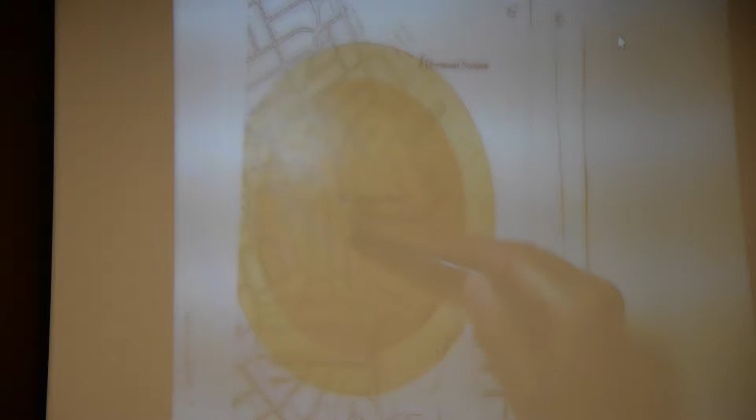So our project is a little bit fuzzy, but you can see it was on a high-profile road, and there were all these churches right across the street that were really remarkable, and then there was a historic building fabric around it. But it was a high-traffic corridor between these transit stops in Pittsburgh, and here's the downtown—this building was on a high-traffic corridor, so it had been lined with awful buildings like this one.

So the property values were up very high, and people weren't expecting that. It was zoned for that. It was hard to make a case for lower residential, but since it's a corridor, it made sense to have a higher density.

But, on the same token, right across the street was some of those beautiful churches in Pittsburgh like this. And some of the residential houses of that neighborhood were, and everybody knows Mount Lebanon for its wonderful English Romantic architecture. So the question was, how do you marry those styles?

So the invention that is going on here is kind of an example of what we did here. What we had to do was try to consider how you bring together styles and things that are not necessarily compatible, which was a challenge. So we learned our basic architectural techniques of base and top, and then we kind of evolved them. I'll talk about that in a minute.

We also tried to create local symmetries, and at the same time understanding how this has almost the evocative shape of a house, or single-family residential house, on top of a larger building. So it became a kind of flavor that goes together.

In the site plan, this is actually a gateway to Mount Lebanon. When you drive up the hill, you actually see this rising above you, and you can see the turrets of the church right across the street.

So the idea is how we took the strategies we learned, basic strategies, and then applied them in this particular context. We also have a second building down the way here. That will help roll into some of the discussions we can go through in our examples. Keep that going.

So what I'll do is we provided you with two pieces of trace paper, there's more if you need some. We're hoping that we're going to be drawing along some examples and ideas, and let you guys learn some of these techniques if they're interesting to you.

So the first thing in terms of composing a mixed-use building, or almost any house, what we've noticed is that oftentimes people have the wrong paper size. I've seen that a lot, and I've actually noticed it in my own work.

If you're looking at art, say here's a picture of a beautiful building, that kind of thing. If you're looking at the art, you want to be about the diagonal away from it. So that dimension of that building in the drawing is how far you want to be away from it. So when you think about that, it's exactly the same thing when you're working on a mixed-use building.

I've seen people laying out these buildings this large, and they're trying to compose something large, and you can't take it all in your own cone of vision. Michael Jordan had really good wide peripheral vision on the basketball court. I don't, so I have to keep it kind of here. So think about that — sometimes if you're struggling with the composition, maybe just change the scale of your drawing to something that's a little more comfortable.

The other thing is choosing the right scale for what you're doing. Don't try to solve details at a small level. Solve those at a detail that fits your paper size in front of you. If you keep that in mind, you'll always do really well.

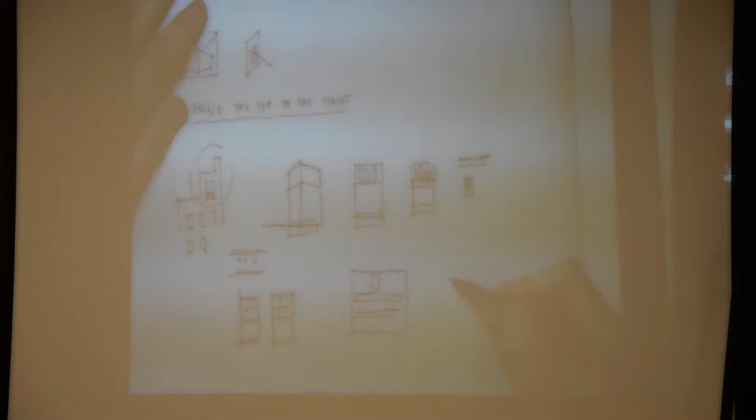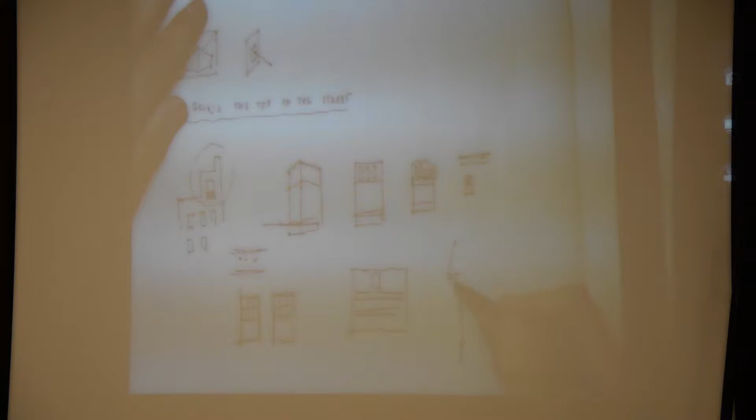So when you look at a building like, say Le Corbu, like Villa Garches, you have these crazy stripes, and then you have these kind of big openings in the strip, but you have this really enormous top to it. What that is, is he had been trained in the classical language, so he knew that if you have a top like this, here's your window - when you're standing on the ground looking at it like that, you can actually project that up, so you can actually read that up higher.

So basically that is the extension of the cornice. You want to think about things from the view from the ground. You can also see that for those skyscraper designers in here - I'll tell you a little bit about that. So, bringing the top to the street.

Let's see, if you were to look at, say, the Chrysler building - something like that - you look at it from a distance, and you can't really see the whole thing, but you can see that it has this huge proportion to it. The idea is that when you look at it from the street, you would be able to see the whole top when you're looking up at it. So this kind of becomes the right scale. When you look at a smaller building, it has the similar idea. So bringing the top to the street is something I wanted to mention.

The second thing I wanted to tell you about is upsize your windows - that's another really important trick. Oftentimes in modernism, the great gift of modernism to architecture was the interconnectedness of the interior and the exterior. So why should we not take that into our own inheritance? When you look at a building and try to put really small windows like that - particularly today, sometimes we're trying to do more livable interiors and get as tall ceilings as we can - if you do really small windows, the exterior tends to not look as strong.

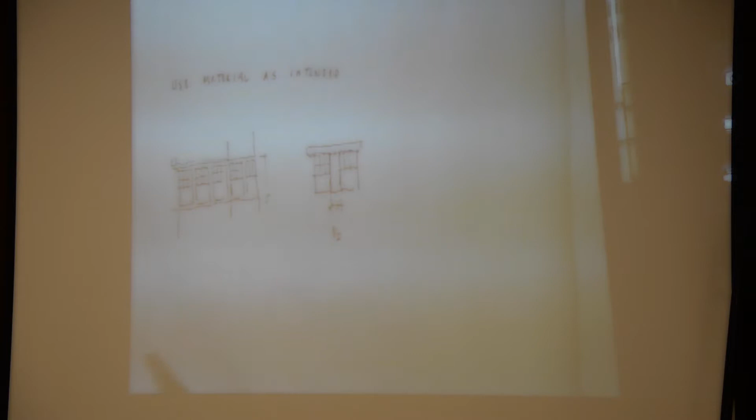And then the other thing is in stone, or masonry, generally when you get more than 3 windows wide in composing a facade, you really need to think about the fact that the expression of that lintel needs to be large enough to feel like it can go. Now, you may be saying, oh, Eric, when we've got a brick building, it's wood framing underneath and so forth. It's just a natural compositional technique that probably makes more sense.

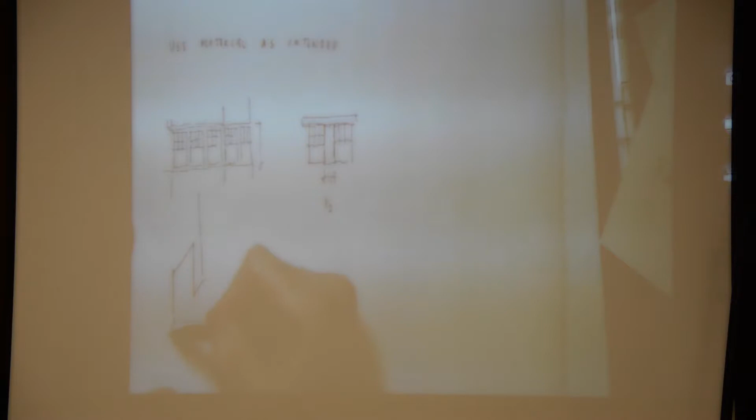The other thing is that when you're working in a material, for instance a stone facade, it's important to find the right time to switch over materials. So if you're thinking about a facade where, massing-wise, you want to bump out. So you have a room on the base of a building. Here's your building, and you're gonna pop something out like that. Think about making that in an alternative material to make it read like this is a masonry opening in the building. So here's the windows here.

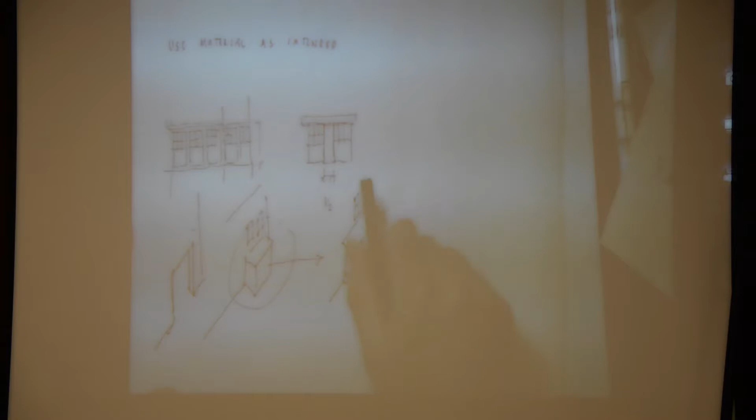So you may want this to read like maybe it's stone. Maybe it goes to steel, or wood. That way, the masonry building next to it reads stronger. Let me show you an example of that as well.

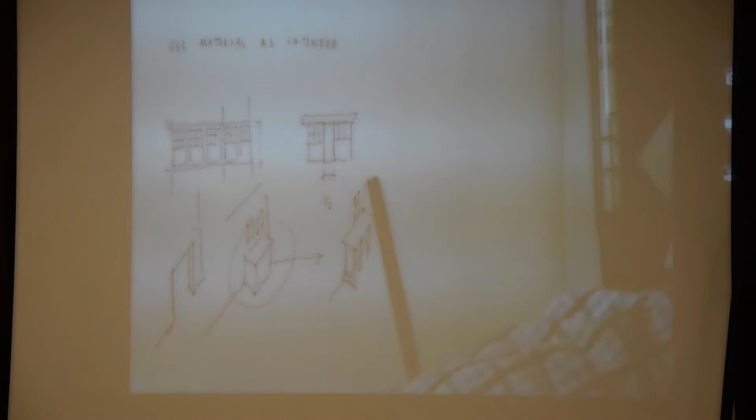Sorry, misplaced that one. But nevertheless, switching materials is a critical... understanding where to switch your materials. So for example, let's go back to this one for a second. If you were doing a brick building, and we're working on some buildings in Detroit like this, where we have, right here, a pair of double hung windows.

And then you go to 5 windows. This is changing over to, it's an industrial area, this is changing over to steel at this point. So we have steel panels. So if you have to group windows, consider changing your material and following that along. So that would be the next lesson.

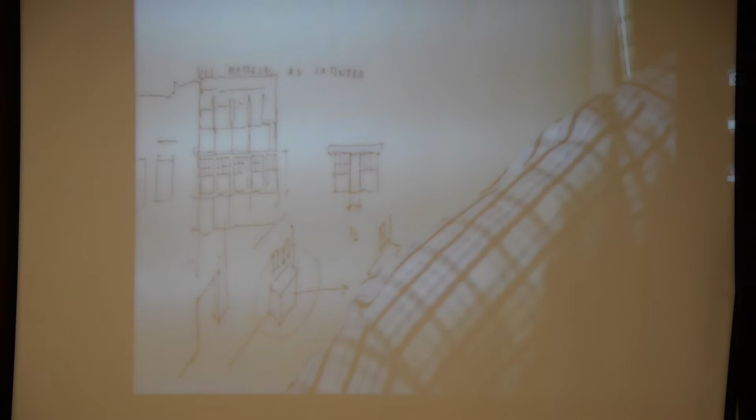So another one, one thing that I see oftentimes as a mistake, is watch your corners. This goes to the same thing as the wood consideration. We see this all the time, where if you're doing a window here, staying away. Keep in mind that there's a certain dimension at which you can't get any closer, and you need to start thinking about changing your language.

So, for instance, here with masonry, I'd say you want to think about 1/2 to 2/3 the width of the window, and you start getting too close. When you get to 1/2, it really gets too close. And same thing with wood framing, because sometimes you're going to trim out a window. It may even be more, because historically they would have balloon framing or regular wood framing. They need to be able to give that some shear with some diagonals there.

So you want to keep your window away from the corner as much as possible, because when you start to lay this out, you need to have enough siding there to fit around the corner. So if you have to go into the corner, which you do sometimes, same as what we just laid out in Detroit, you might gang windows together, and that might become a special component of your building in the masonry.

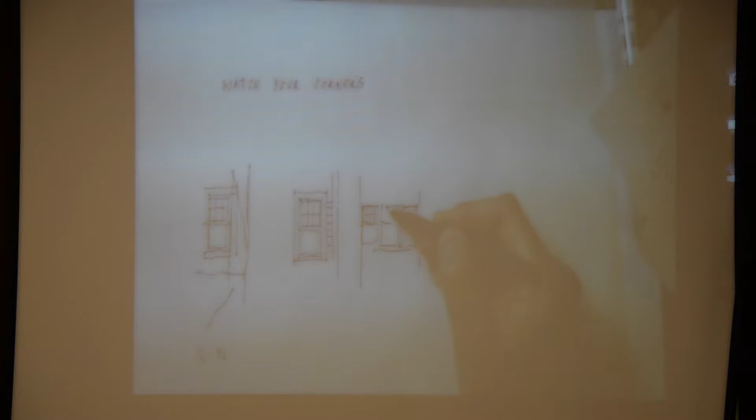So you group them together so it looks intentional, and you also would wrap that around the corner too. So if this was a perspective, you go ahead and wrap around the corner there. That way you get corner views and things like that.

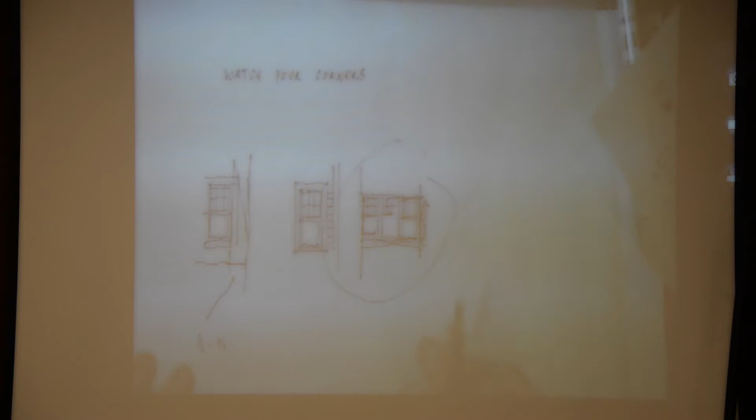Okay, the big one I think, and this is where we start getting a more important component, is give the eye a rest when you're designing. It's kind of a funny phrase, the eye a rest. The important thing when you're looking at compositions is that you sometimes have repetitive elements, and those repetitive elements are then stopped by hierarchical elements. Every once in a while you need something for your eye to rest on. I'll show you a couple examples in buildings.

When you think about that as an architectural facade composition, you might have a building that's, say, 3 stories tall, and we'll work on one similar to this in a second. Then there may be a tower, something like that. So this is where your eye is resting compared with the repetitive elements next to it. You can see this a lot in even modern compositions.

John Hejduk, guy out of New York, would do these compositional diagrams where you have a hierarchical element and 2 symmetrical elements next to it. Same thing with Michael Graves. Michael Graves gave a lecture when I was an undergraduate, and he kept showing composition after composition of 2 simple forms and a hierarchical form.

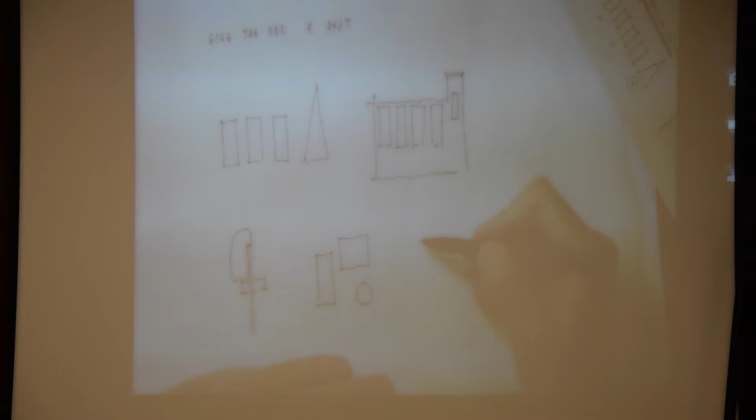Even when you look at Leon Krier's work, you might do a temple form, and then next to it some sort of tower like this. You'll see that kind of thing. But then, okay, let's go to that New England church.

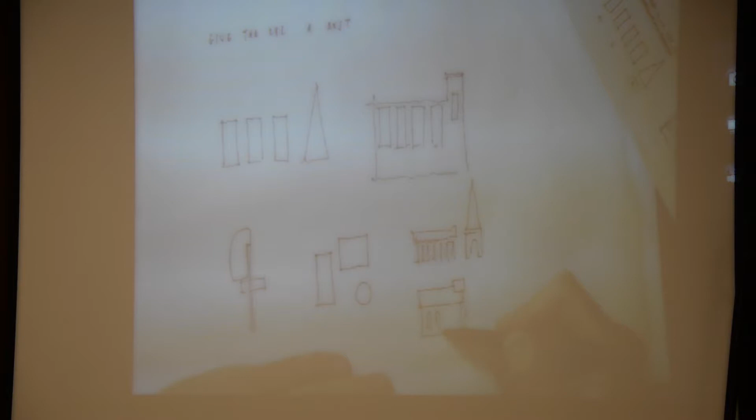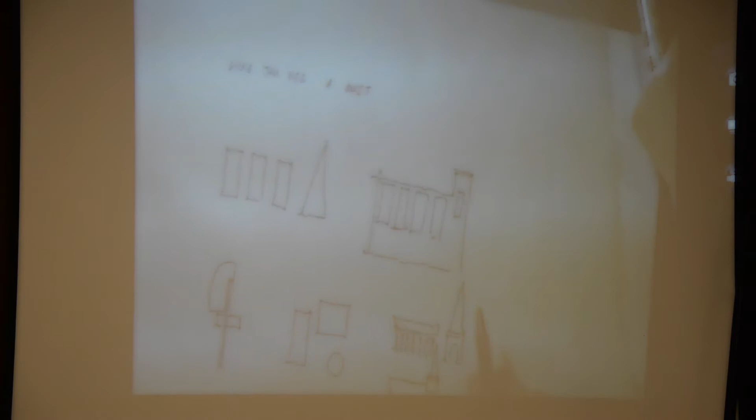Gibbsian church, or repetitive elements, or something like that. So you see this. You can go from architecture to architecture, and there's that similar strategy where you give your eye a kind of break. So even when you're designing a repetitive building, and that's the next lesson, you need to give something a break. So we're seeing buildings that need a little bit of help.

So there's some basic strategies for compositions for mixed-use buildings, and then we're going to finish on a high note with Eric in residential architecture. Some of these strategies will go there as well, in the thinking. So the pretty simple one is, let's just break it down into 3 simple ones. There's nothing wrong with that fabric. And when you think about the composition of a whole street, you may think about having something to balance it out and give your eye rest in that location. So this is one composition.

The other one, and these are kind of brutally abstract, but there's also emphasis of the end bays. And that might be where you're giving that. So these may be heavier, and then you have that kind of thing. You can see that all over the place. There's a Liberty building just down the street here in Buffalo. Same thing, it has these ziggurat tops, Statue of Liberty on top.

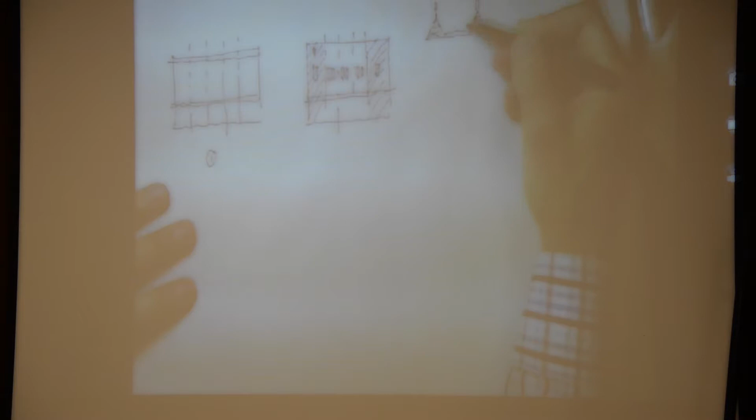Dave Schott, who's in here, was telling a story. There was some German banking thing or something like that, and then in World War I the Germans were out of favor, so it turned into the Liberty building. So again, same kind of thing where you have emphasis on the end bays. So that's composition 2.

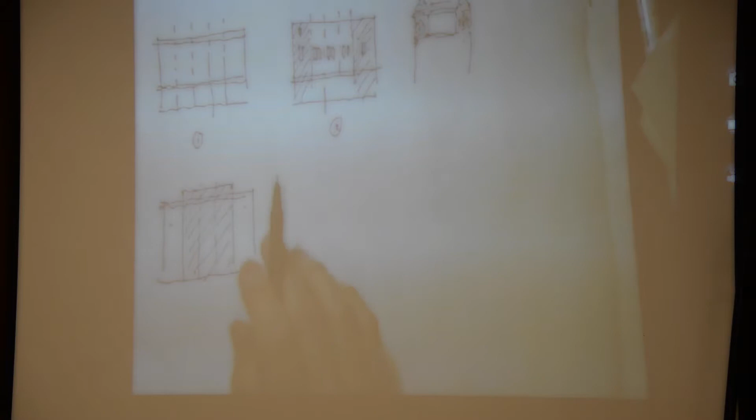Composition 3 might be where you have a focus on the center bay. This may be 1 bay, it may be 3 bays, but there's more emphasis here than on the end bays, so your eye is going to the center of the drawing. So that's composition 3. And once you get those down, you can start having a little more fun and say, okay, I want to break this down.

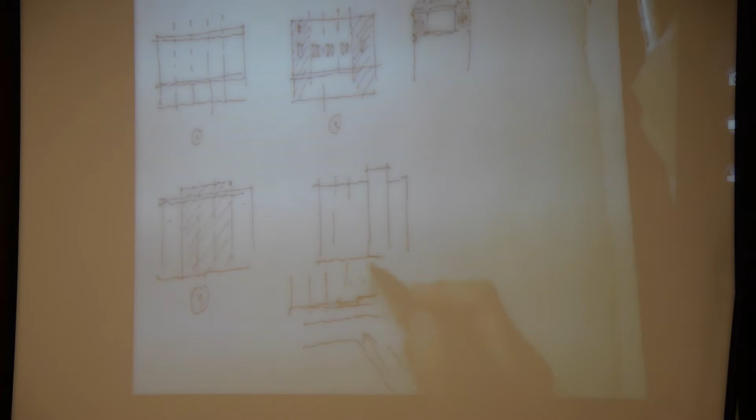I want to have this 4th bay, maybe there's a street that's coming up, and you got a building here, and you want to punch out that bay there. So you may want to have a relationship to that, so you may want to have this 4th bay. Once you get the structure, you can decide where you want to put that emphasis. So that's a general strategy.

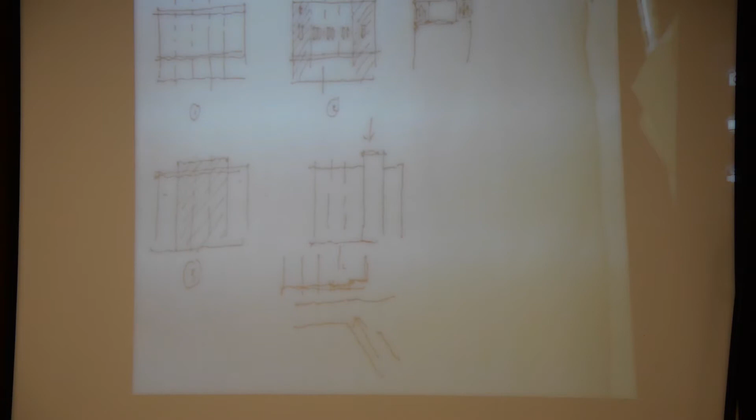Now I'm going to get into real quick the composition. So if you're composing a street, can everybody see that? You look at the skyline of a city. Let's just take Chicago. There's buildings and all kinds of things. And then there's Trump's Tower, and Standard Oil is over here, and then there's Sears Tower. So instead of it just being a pure mound, there's areas on which your eye is resting.

You look at New York, and there's Midtown, and then there's the Wall Street area. It's kind of a logical sweep. Part of that has to do with geology. I guess the Empire State Building's in there somewhere. But nevertheless, there's areas where your eye can rest. So when you're laying out a street with a number of buildings, sometimes you may do a symmetrical building here, maybe another symmetrical building here.

Then every once in a while, introducing something with a hierarchy. So balancing symmetrical and asymmetrical, and again, let's keep in mind what we talked about early on about understanding your own context, but it's oftentimes just good practice to have a place where your eye, like I was saying, gets a rest. So here's

So the first thing we do when we're designing a building, oftentimes mixed-use buildings, you have to do your best to get it sited correctly where it needs to sit in order to make a street. And then there's oftentimes a developer program you have to consider. So you're sometimes stuck within a framework. So the idea is to try to do as much as you can with the elevation while you have it. Eric's going to take you through the evolution of a floor plan and how that becomes a really rich elevation, which I think is critical.

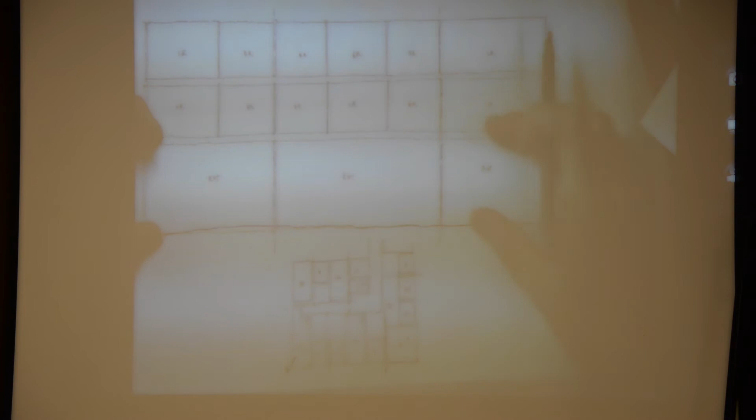But we oftentimes do a section elevation. So what you're looking at is basically the building. This is the facade. So here's the street. This ground level, this is at scale, and that's the other thing I mentioned about choosing the right scale. This is a retail base, and you can see we've got 16 feet for that.

Just as a tip, if you're designing buildings, 16 feet is a good size because oftentimes retailers will want it. It's nice to have really tall ceilings, operable transom windows up above to let the light down. And you can do some really interesting things with light shelves that bounce light off the ceiling. Oftentimes there can be fans to help move the air. Retail spaces that are really tight can work in some unique contexts, but generally, keep it as high as you can to get that light deeper in the store.

So, for instance, this building is double loaded, which is not my favorite. We like to do single loaded as much as possible. Single loaded meaning that there's a corridor on a light well in the back or something like that. Double loaded is kind of inhumane. Interestingly enough, we did some work in India where we were able to get extremely high densities with single loaded buildings. There's a perception that double loaded is more density, but nevertheless, they get extremely deep. So you want to get as much light as possible. That's why it's important to have that dimension.

I'm also putting a little sandwich of 1 foot plus for the structure. Could be up to 2 feet. There's a living room. This story, I've got a 10 foot and another 10 foot. So that's our basic structure.

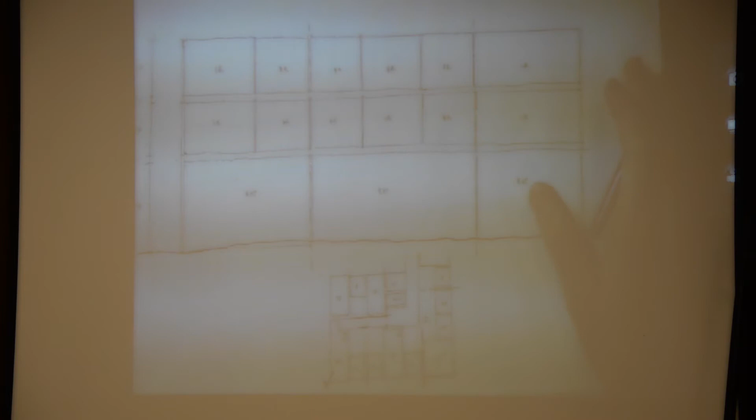So this is kind of the way we start when we're composing an elevation of a building that's already fixed. And really, if you want to move really quickly, lay it out in SketchUp and then just print the SketchUp model in elevation at scale. So what I always look at first is I've got a bedroom, living room, bedroom, bedroom, living room at the end. So it's to try to give that some sort of repetition or to set up something at the end or set up some sort of move.

So first of all, I'm going to say, well, look, these are a logical place to put bays because I can't put windows on that structure. So I've got a larger bay at the end, and I've got a slightly larger bay at this end. Now this living room is a little bit bigger, so you can kind of fudge that bay there. So you got your 4 bays. Well, I really want to make something large enough that reads as bays. So sometimes I just draw a diagram.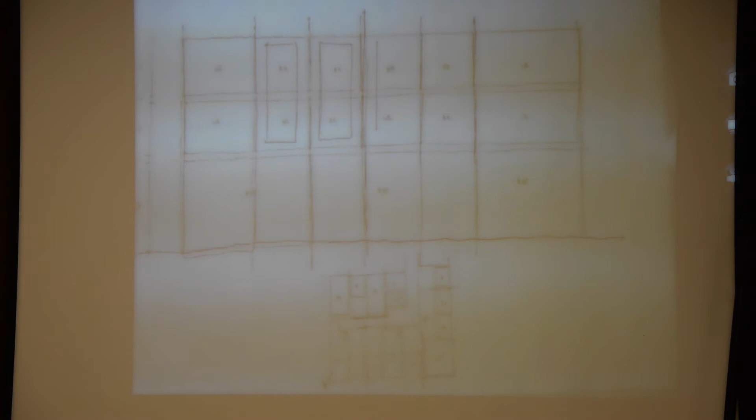If you can get your diagram working really well, you can add stuff no matter what, all these different languages, and it's going to be a great looking building from there on out. So always keep working until your diagram looks good in just its pure form. So don't try to add detail too quickly. We see that constantly, people are working out all the windows on this one bay, getting all the details out, and then they go, oh wow, this really didn't look that good. Well, if you have the good diagram, you're going to be golden.

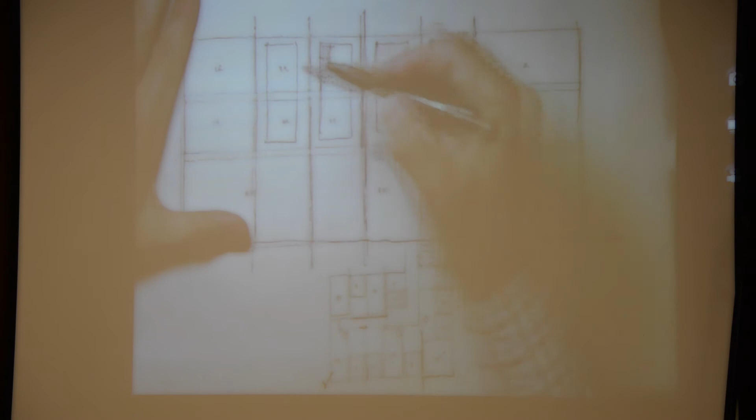So going back to this, I'm going to go ahead and create a diagram here. I'm going to get the four bays here, and then one of the things about a deep building like this is the roof. You don't want to just roof a 65-foot building like this because it looks really flat. It's like something you see in the suburbs. So oftentimes you got to push and pull a little bit.

I'm going to give it a gable on this end. Maybe I pull that up a little bit on this end to kind of punctuate that bay. Maybe I'll do the same here. So I've got two tall bays here. It's going to help turn the corner that direction. And then maybe I'll put a larger bay on that end.

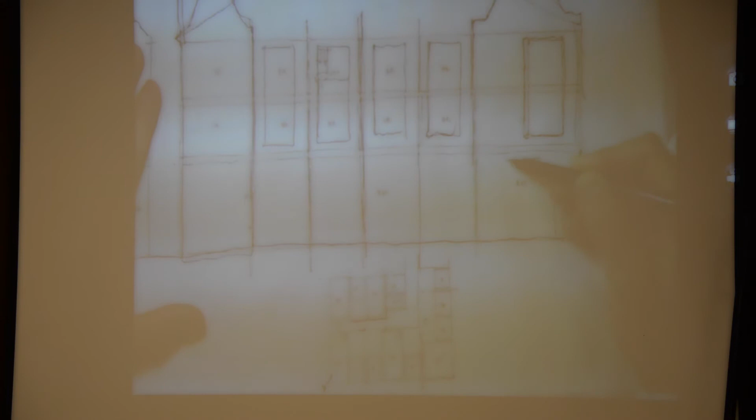Building entries are really critical. So let's go ahead and put something on the corner. A really fun entry here. And then think about how these things then shape the diagram. I'm going to clean up this diagram, and then I'm going to show you our kit of parts before I turn this over to Big Fish, Eric Osth.

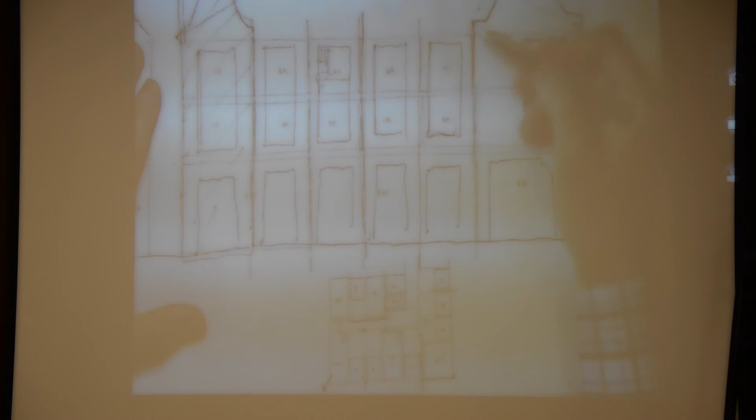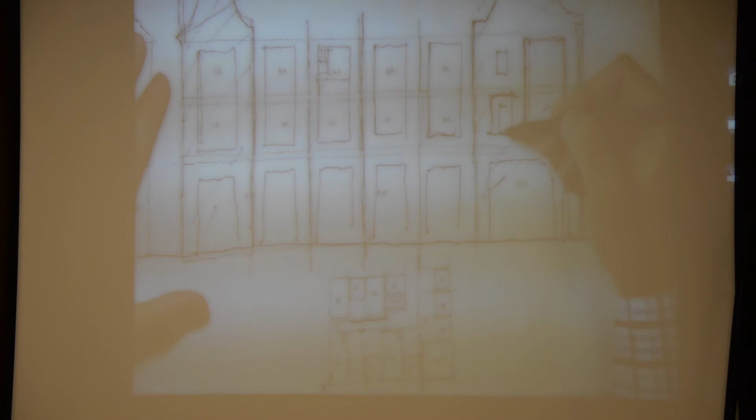So what we've got is a highlighted bay here, and then a big bay here. So then I've got some extra room. Maybe this needs some other windows here. Maybe a little bit of wall here, and then to reinforce the symmetry, maybe there's a window here that sits over this one. So I diagram like that. I figure that's kind of the way to start.

And then you kind of clean up your diagram. Clean that up pretty simply, and then just think about that. So I've got these kind of repetitive bays right now, and this is getting a little too repetitive now. I'm thinking to myself, why don't I go ahead and put some balconies on these four?

And I've got these retail things - they actually may be much wider than I'm drawing, because you can usually get a pretty light base. And I've got a kind of fun corner condition here.

Always make sure you do a good job in the corner of the building - it's usually what's seen the most. When you're thinking about where to spend your money on a building, you want to spend it at the base, because that's where pedestrians see it, and also at the top. Anything in between can get a little more economical.

Look at that, and keep looking at your diagram. Take it off of there. See how it's going - you're starting to get some shape. Put a base on it here.

Okay, so what's the next step? You get a diagram that you like, and so you kind of establish your kit of parts. You've got a balcony - figure out your balcony design.

This balcony design may be based on something designed locally that you've seen in the neighborhood, and also something you know you can build in terms of affordability. You kind of get your kit of parts of windows - maybe there are some great casement windows that your client is willing to afford, really terrific stuff. I love those windows. Then maybe you've got a nice doorway, full light glass, maybe some panes of glass.

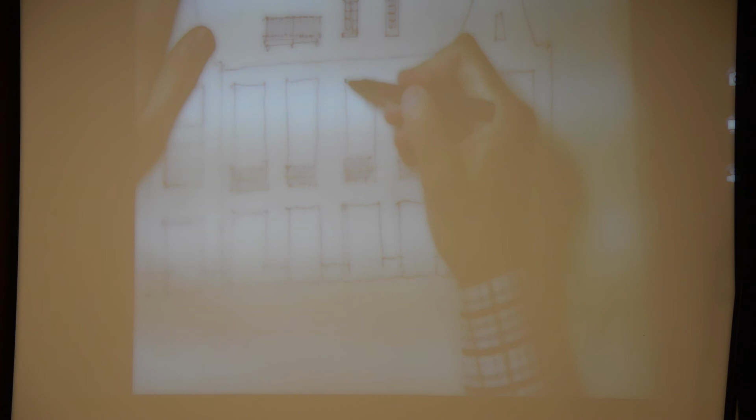So you line up the kinds of things you use, and then you apply that. Typically we will go ahead and Photoshop things, just to move along if you're really in a crunch. You can create an underlay by drawing it once and then Photoshopping it across the facade if you need to go quickly.

And you can design your bay, balconies and so forth on there, and then maybe you've got your doorway here, and your window.

Once you get yourself set, maybe your roof line and your eave - knowing the eave is going to give you that cornice configuration. Your window's here, it's going to give you that configuration there. And maybe you've got your storefront down below, and you can go ahead and put your transom in here. You can do some shaped work in the masonry there.